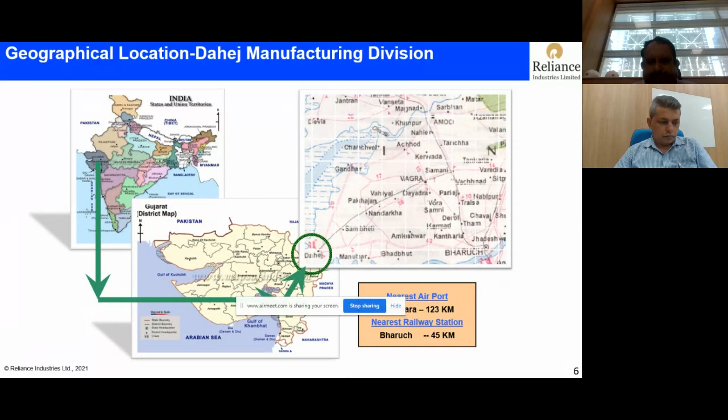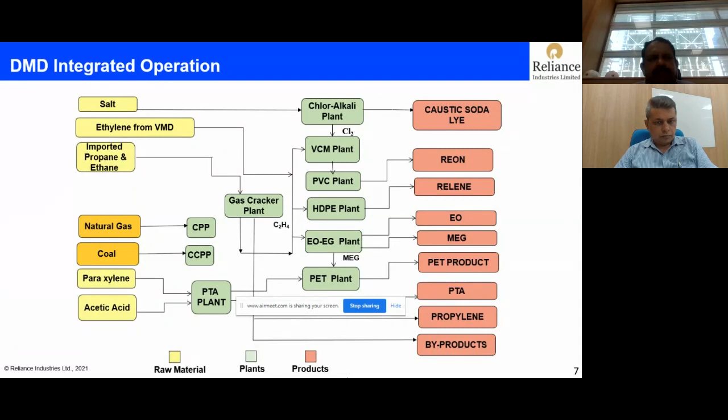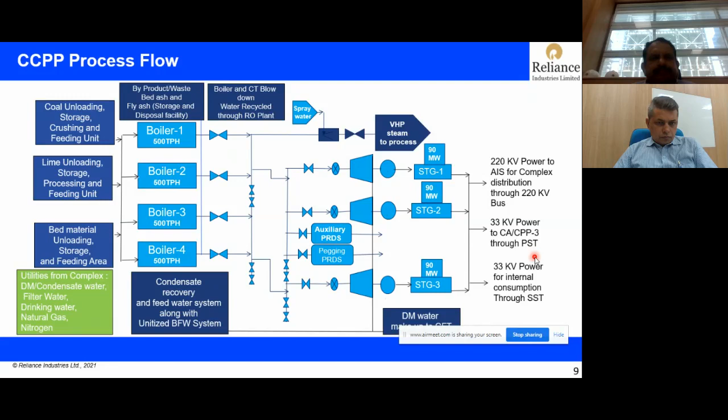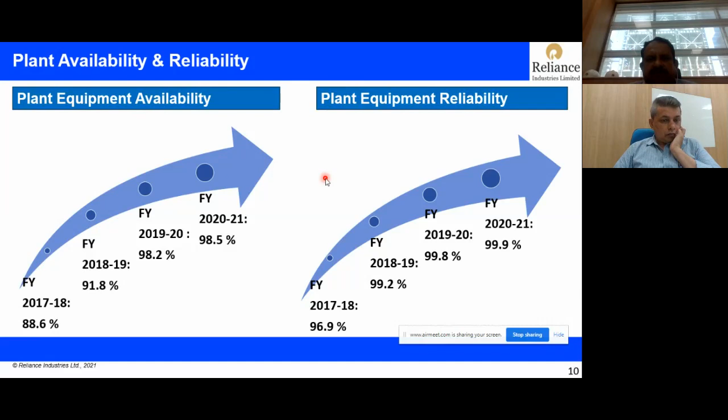When we say MHPC, it is main header pressure control - the entire process itself is automated under normal circumstances. All the boilers are controlled by a process controller, whereby the pressure is maintained. Normal pressure is maintained at around 108 kg, and even with process upsets, we continue to supply to the grid at around 1100 tons out of the 2000 ton capacity.

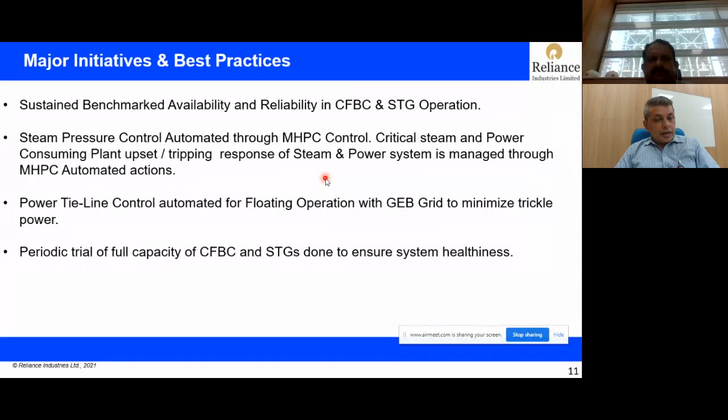Periodic trial of full capacity of CFBC and STG - every month we have one CFBC and one STG trial. So literally every quarter you'll have an STG trial, and every 4 months a CFBC trial. If one CFBC is tried in January, it will be tried again in May. That is how we maintain the capacity, maintain reliability, and identify problems.

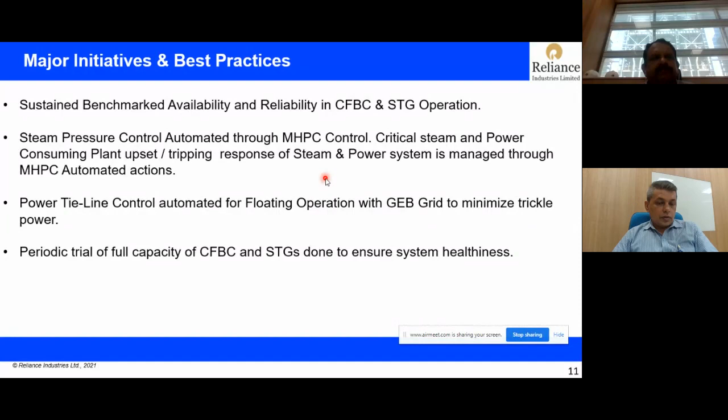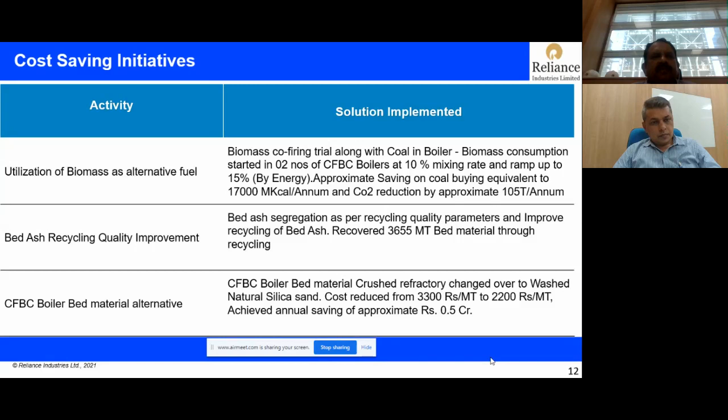Here I want to share a case study, use of biomass as alternative fuel in CFBC boilers. Generally, in stoker fired boilers, there are many plants who are using biomass as alternative fuel. But there is a technology difference in CFBC boiler. All bed material in our furnace remains in fluidized condition, and biomass is a low density fuel. So many modifications and improvements have been carried out for use of biomass.

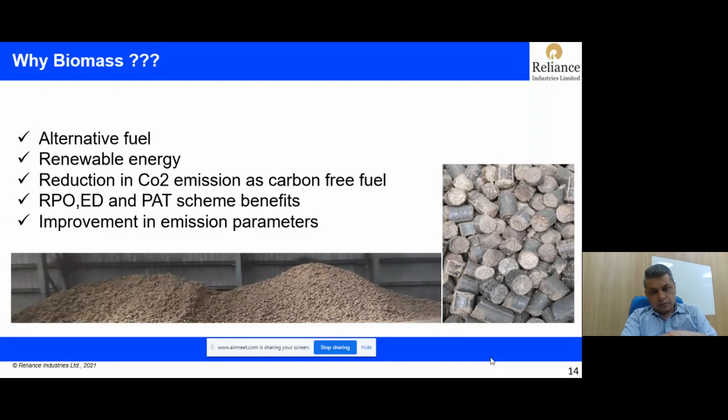So first question is why we use biomass. So biomass is an alternative fuel. Second one is it is a renewable energy and also helps in reduction of CO2 emission, as this is considered a carbon free fuel. Also we can avail RPO, ED and PAT scheme benefits. So first we have taken a trial in our presentation.

Okay sir. Now visible sir. Yes. Okay.

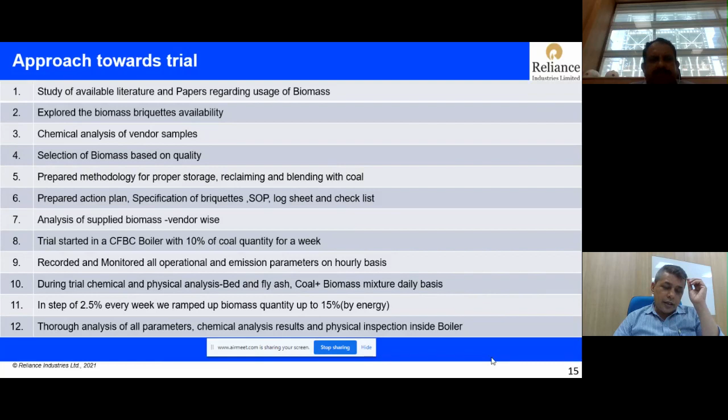For trial of biomass uses, this is our approach. Point 1, study of available literature and papers regarding usage of biomass, so we can collect the required information. This is because largely the biomass usage is limited to 15% at most of the places. That is what we have come to know in India. Most of the users who are using biomass are limited to 15%, and we are trying to establish that biomass usage limitation will not be there. We can reach a maximum number as much as possible, current targets being around 35 to 40% without any significant modification in the existing facility.

So for that, we have gone through a lot of literature, talked to as many people who are experts in the area, and are still to hire a few of them when we are looking at moving beyond, and if we need certain modifications, while our boiler does not sacrifice.

Continue, Vikas ji. Okay, sir.

We explored the biomass briquettes availability in the nearby area. Then we arranged chemical analysis of vendor samples. Then selection of biomass based on quality. We prepared a methodology for proper storage, reclaiming and blending with coal. We also prepared action plan, specification of briquettes, SOPs, log sheet and checklist. When vendors started delivering biomass, we started analysis vendor wise, and the trial started in a CFBC boiler with 10% of coal quantity for a week.

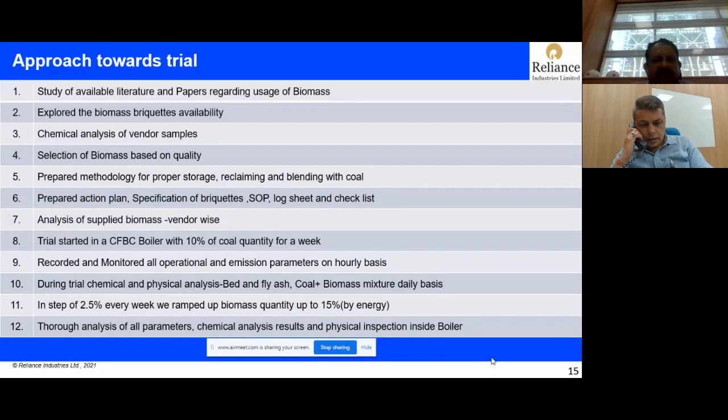We recorded and monitored all key operational and emission parameters on hourly basis. During trial, chemical and physical analysis like bed and fly ash, coal plus biomass mixture on daily basis. In a step of 2.5%, every week we ramped up biomass quantity up to 15% by energy. Thorough analysis of parameters, chemical analysis results, and physical inspection inside the boiler, thorough analysis of all parameters.

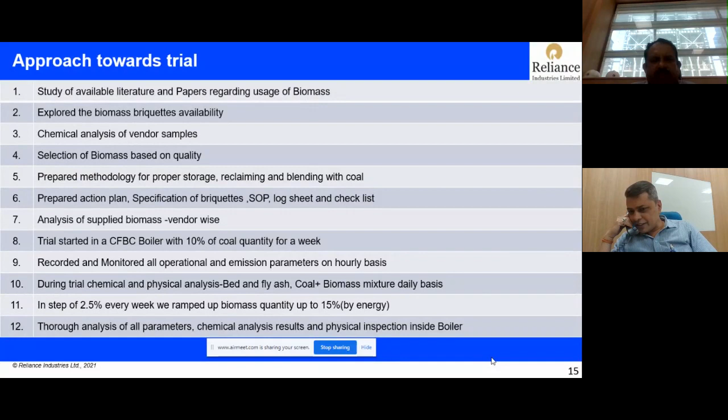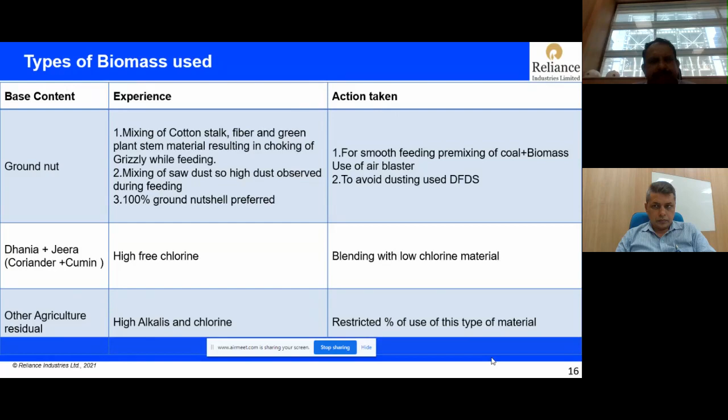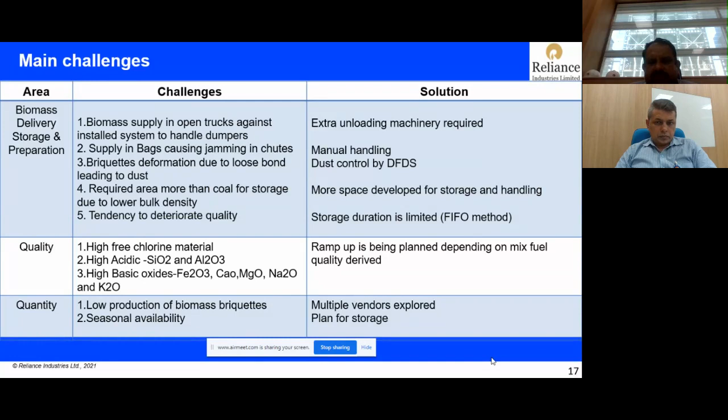The second main challenge area was quality. As I told, we received high free chlorine material and high acidic and high basic oxide material, so ramp up is being planned depending on the mixed fuel quality derived. The third main challenge is quantity. As we know, production of biomass briquettes is low, so we explored multiple vendors, and availability of biomass is also seasonal, so we have planned for long-term storage.

These are the main analyses we carried out. For chemical analysis, with a vendor-wise composite sample, we collected data for proximate and ultimate analysis, ash elemental analysis and oxides in ash residue. We also analyzed ash fusion temperature, free chlorine and bulk density. We also did physical observation of condition: moist, loose bags, packed, etc., size of briquettes, crushed or shredded size, and presence of fibrous and oily material. Material from every truck and dumper was physically observed.

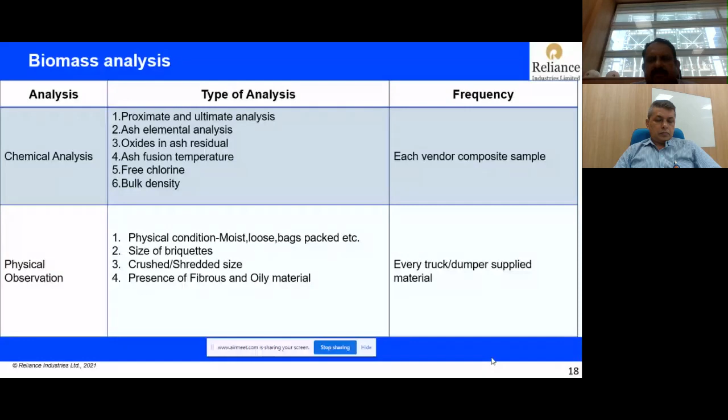These are the main key learnings during the trial. GCV of biomass: volatile matter is higher than coal, but the specific heating value of volatiles in kilojoules per kg is lower for biomass than coal. Biomass GCV is in the range of 3500 to 3900 kilocalories per kg. Fuel air ratio: fuel air ratio, pressure and heating rate significantly influence the heat release rate needed to achieve a uniform temperature profile in our furnace and boiler second pass. Up to 10% there is no requirement for air adjustment, but above 12.5% mixing, slight air adjustment was carried out.

Contaminants: alkali metals and high chlorine presence are the main reasons for slagging, fouling and corrosion, so we reduce the concentration of alkali material and high free chlorine by blending with low-contaminant material. Ash melting temperature: the content of alkali metals, phosphorus, chlorine, silica, aluminium and calcium in ash affects ash melting temperature. We analyzed it and found the ash melting temperature was close to our coal ash melting temperature.

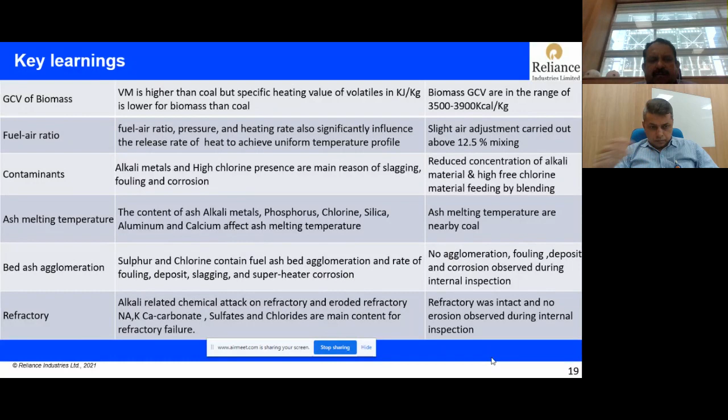Bed ash agglomeration: sulfur and chlorine in fuel ash affect bed agglomeration and the rate of fouling, deposit slagging and superheater corrosion. No agglomeration, fouling, deposits or corrosion were observed during our boiler internal inspection. Refractory: alkali-related chemical attack erodes refractory; sodium, potassium, calcium carbonate, sulfates and chlorides are the main contents affecting refractory, and no erosion was observed during our internal inspection.

These are the main best practices adopted. For monitoring, we closely observe all our flue gas and metal temperature measurements.

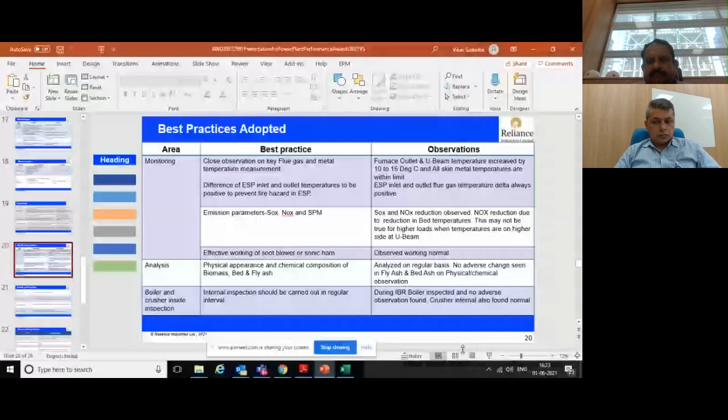Okay, sir. I think so. Visible? Yes. Okay.

So, some best practices we adopted during the trial, like monitoring. We closely observed all our key flue gas and metal temperature measurements, and our observation was that furnace outlet and U-beam temperatures increased by 10 to 15 degrees centigrade, and all skin metal temperatures were within limits. The difference between ESP inlet and outlet temperature should be positive to prevent fire hazard in the ESP. The ESP inlet and outlet flue gas temperature delta was always positive during our trial.

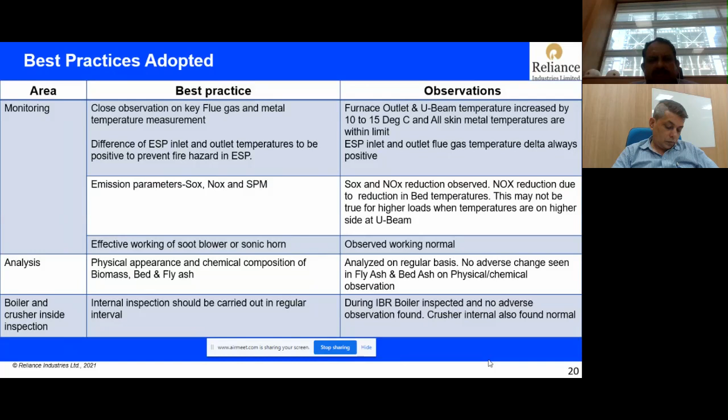Emission parameters: SOx, NOx and SPM. SOx and NOx reduction was observed. NOx reduction was due to reduced bed temperatures, as biomass density is less, so it fires at a higher elevation, and this may not hold for higher loads when temperatures at the U-beam are on the higher side. For SOx reduction, as biomass contains a lower sulfur percentage than coal, overall SOx was less.

Effective working of soot blowers or sonic horns: we have sonic horns in our air preheater area, and we found them working normally. Analysis of the physical appearance and chemical composition of biomass, bed ash and fly ash: we analyze on a regular basis. No adverse changes were seen in fly ash and bed ash on physical and chemical observation, up to 15% biomass by energy.

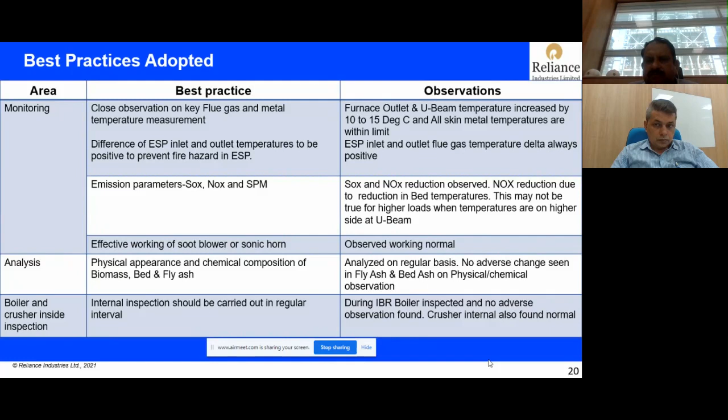The boiler and crusher were also inspected inside; the boiler was inspected during our IBR shutdown. No adverse observations were found, and crusher internals were also found normal. These are the main benefits and our future plan. The first main benefit is carbon footprint.

Vikasji, you cannot see your presentation, sorry. Okay.

Okay, sir, now visible? Yes.

These are main benefits and our future plan. First main benefit is carbon footprint. This is a step towards achieving carbon neutrality, as biomass is a carbon neutral fuel. For RPO and ED benefits, usage of biomass to be ramped up in all our four boilers. For PAT scheme benefits, usage of biomass to be ramped up also in all four boilers.

For emission parameters, due to low sulfur in biomass, SOx reduction is there, and due to lesser temperature in bed during biomass usage, we observe NOx reduction, which both are main benefits.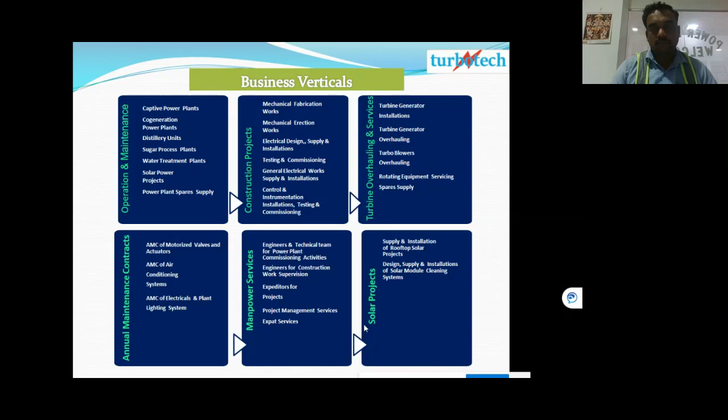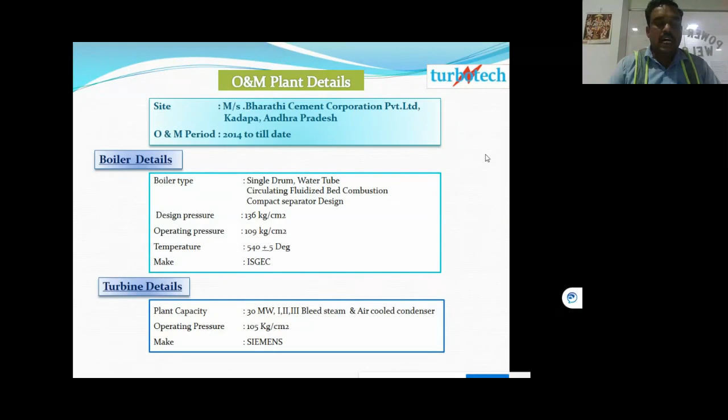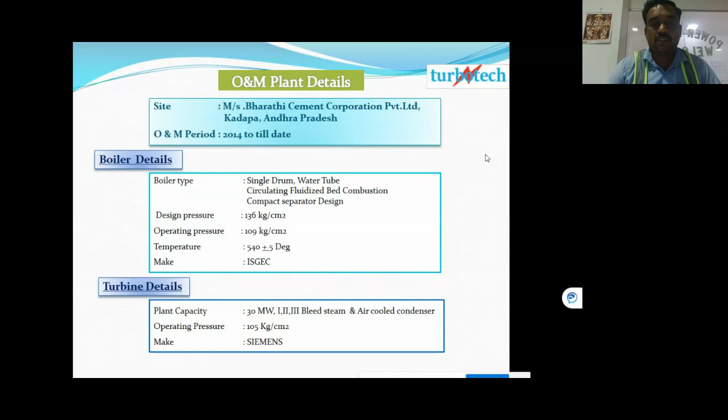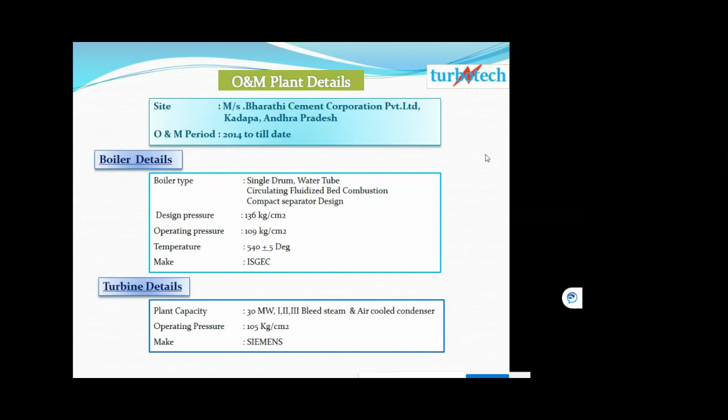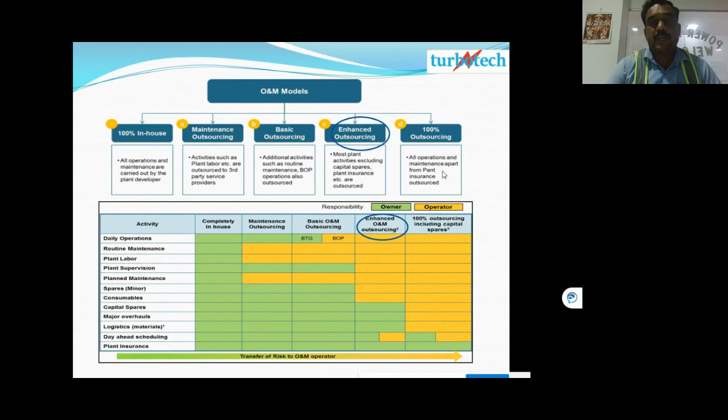These are the standard O&M models. There are five models. Ours is model number 4, engagement of outsourcers for most plant activities, excluding capital spares and plant insurance as extra. This is our O&M model. We have six departments: operations and efficiency, maintenance and overhauling, safety and environment, human resource, procurement and engineering, training and IR.

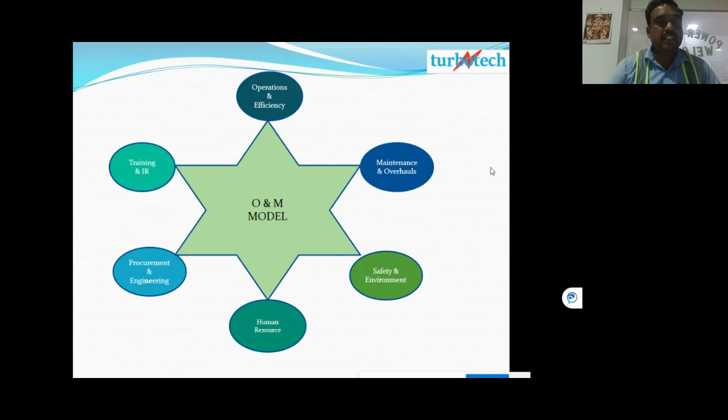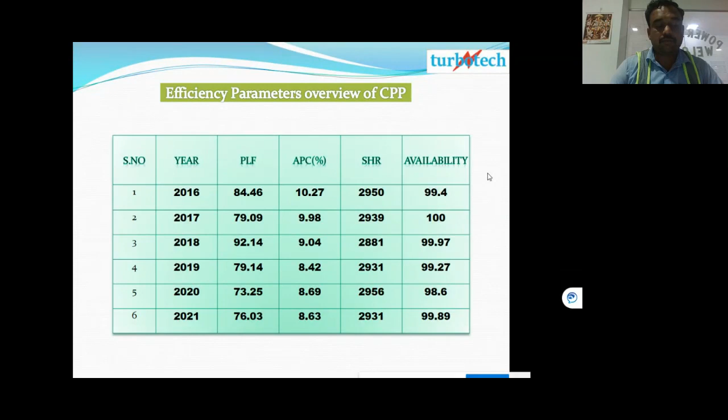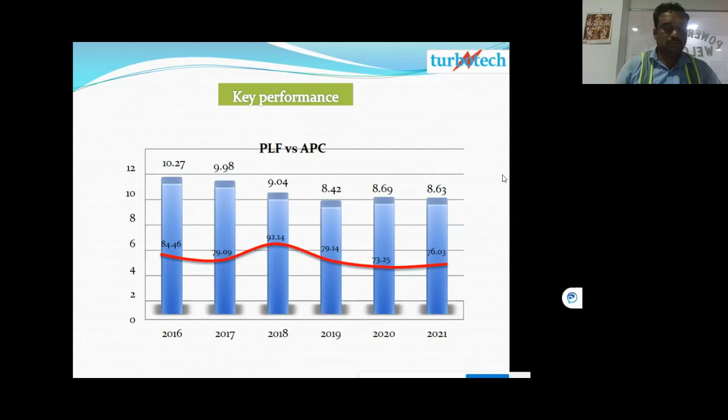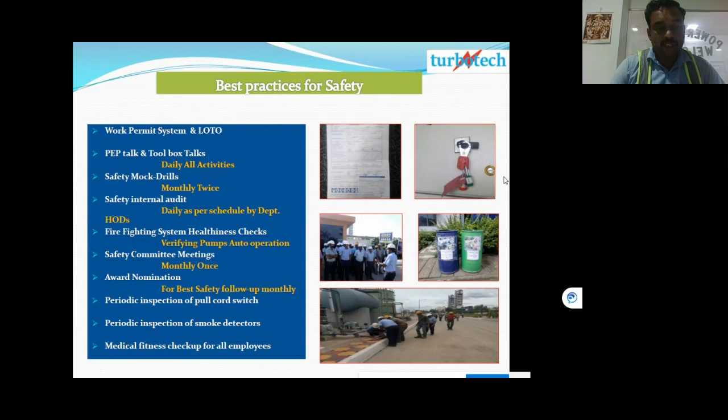We start with everyday safety. Safety first. We maintain the following safety practices: 100% work permit and LOTO system, PEP talk and toolbox talk daily, safety mock drill twice monthly, daily safety internal auditing as per schedule by department HODs, firefighting system healthiness checkup, safety committee meeting once a month, award nomination for best safety follow-up, periodic pull cord inspection, periodic smoke detector checks, and medical checkup for all employees.

Here I am showing the innovative power saving projects. I am not discussing VFDs here; we have already installed VFDs on most equipment. We discuss only innovative power projects. Our plant operates two compressors for the ash handling system, and one for instrumentation. For energy saving, we implemented logical sequence operation of the pneumatic conveying system. Earlier it operated multiple systems simultaneously. After modifying this logic, we reduced auxiliary power consumption by 720 units per day, reduced the compressed air requirement, and switched off a compressor.

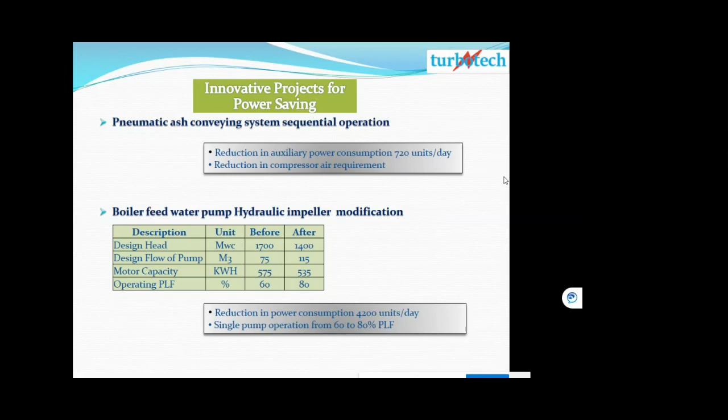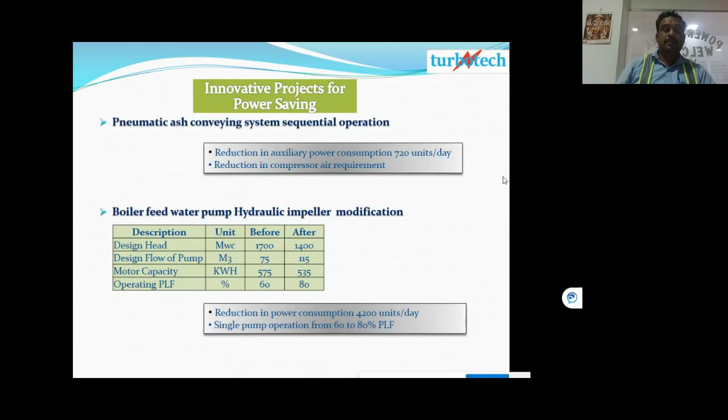One of the best innovative projects, emission control. Earlier the plant was designed with a crushed limestone system. SOx emission limitation was 1500 milligram per normal meter cube. After that, pollution norms changed to 600 milligram per normal meter cube. So it was difficult to achieve this parameter. We implemented raw mill grinding powder from the cement unit for best SOx emission control. We achieved best SOx emission control already.

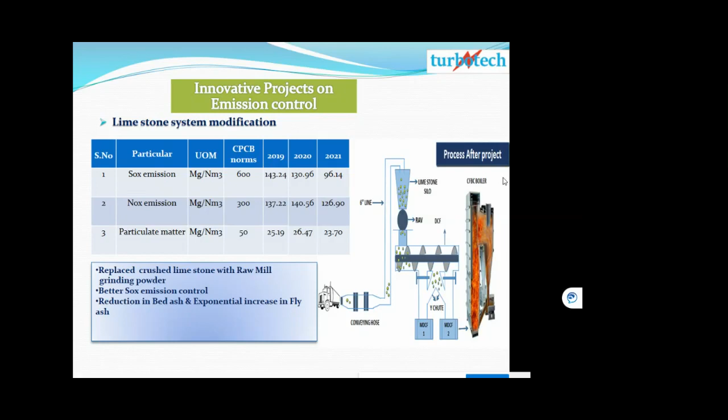Another project for auxiliary saving: air cooled condenser and cooling tower energy efficient fans. Auxiliary reduction project done with better vacuum stability, reducing the fan hub area and weight of the fan, increasing the air intake to ACC.

Another: the Kadapa region ambient temperature is always hot, especially in the months of March to May. So for high ambient temperature, vacuum drop leads to reduced load. To avoid this condition, we implemented an innovative new project, a water mist spray system. Vacuum stability during the summer period, consistent load for export to the cement unit.

Our main water source is from mines, seepage water during the rainy season. Winter and summer water quality changes. So we did an upgrade project for water quality purposes, UF, SAC and SBA. After that, we increased the OBR for the DM plant, reducing the chemical cleaning and reducing the water consumption.

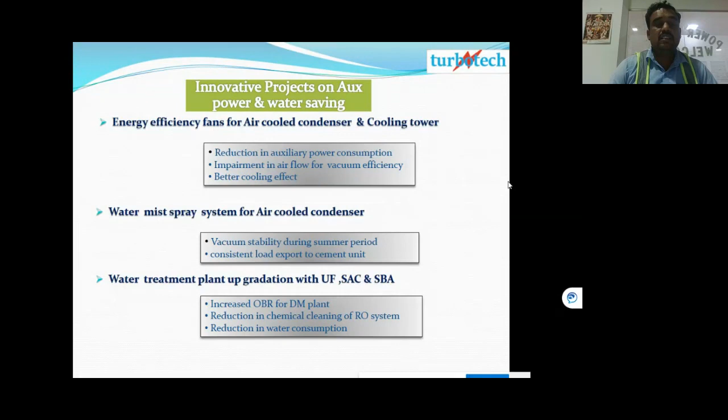We did another project to optimize the PA airflow. Optimize the PA airflow and balance the OFA airflow for best combustion. We achieved auxiliary reduction and reduced refractory damage in the boiler.

Our plant is designed with arrowhead nozzles. We faced the problem of back shifting of bed material into the wind box during plant trips. In this condition, the wind box air bleed off valve opened below 35% PA airflow. We changed it to 0 PA airflow. After that, it's better.

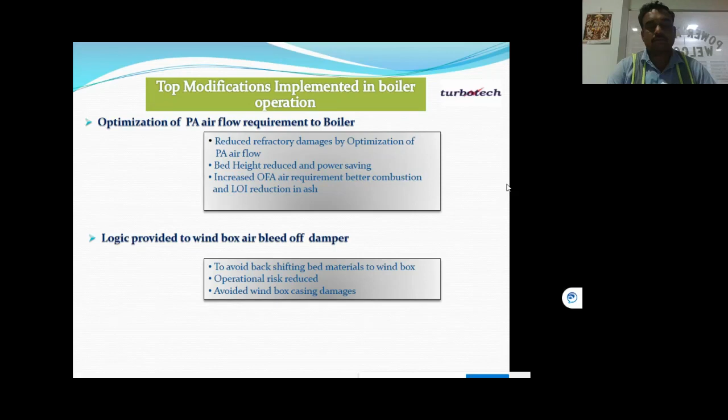We modified and implemented boiler operation and maintenance. Our plant runs in island mode operation with the cement unit. In the cement plant, frequent on-off tripping happens. To avoid this, we provided logic for the startup control valve and fuel feeder auto operation. When load is thrown or breakers open, to avoid excess pressure, the automatic startup control valve will open and switch off the fuel feeder, with combustion control reducing the boiler excess pressure.

Another one, we created efficiency parameters and better DCS control for operator alerts. Another logic, the feed water control system, we modified. Recently we heard that especially in CFBC boilers, the cyclone separator got deformed during water tube leakages. To avoid such a case, we created logic so that when both conditions are satisfied, drum level low as well as furnace top temperature high, the feed water control valve supply to the boiler is cut off.

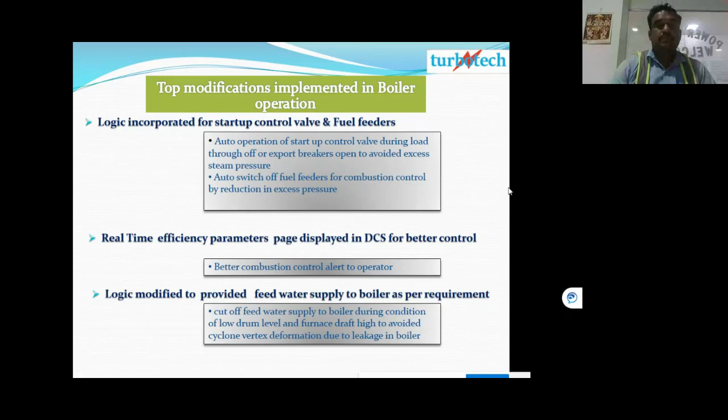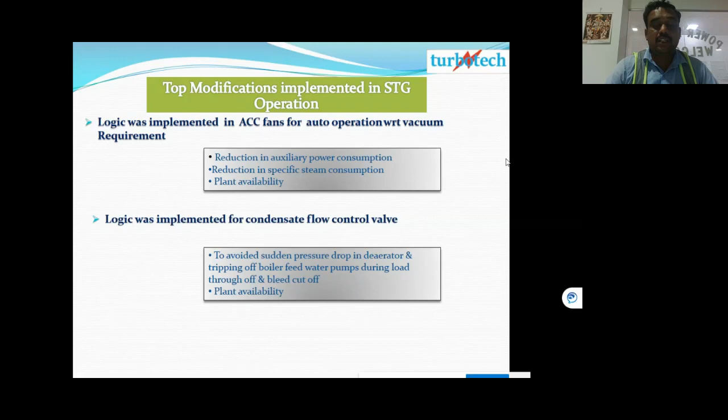Our best practices in operation and efficiency: we conduct a daily morning review meeting, addressing defective equipment and troubles, discussing the previous day's generation, parameters and targets. We review plant performance parameters shift wise. We have shift KPIs. Every shift in charge reports to the operation head as well as the reliever to achieve the KPI.

And we daily review the steam and water quality, comparing the test report with online analysis. We conduct a daily evening coordination meeting, planning, and discussing defects and updates.

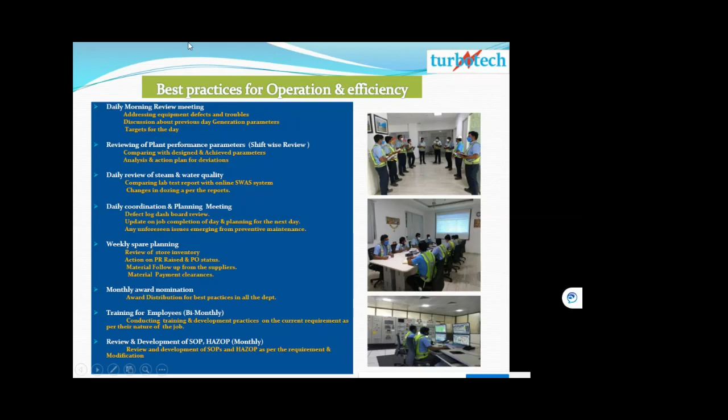We also hold a weekly spares meeting, reviewing the store inventory to check whether required spares are available or not. Action taken, PR raised and PO status, material follow up with suppliers, material payment issue clearance, are discussed every week in the meeting hall.

Monthly we nominate for safety. Monthly award distribution per department. We conduct employee training bi-monthly as per schedule. We review department SOP adherence monthly.

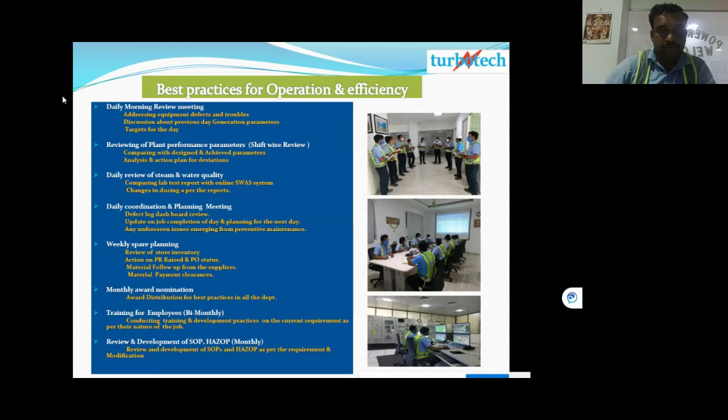We follow best practices in asset management and root cause analysis for failures, combined with discussion, action plan, submitting the report, and analyzing the report.

We address and review the housekeeping register, focus on maintaining good housekeeping, and address leakages and losses.

We implemented a checklist and review it frequently. We address and register leakages and losses, and work to eliminate them.

We monitor emission parameters and ESP healthiness through checklists. We arrange external services for foam cleaning, air-cooled condenser servicing yearly, DCS AMC with 4 visits per year, pressure vessel testing every 6 months, and safety valve servicing yearly.

We address operating efficiency projects, identifying small or big operational efficiency parameters, discuss them with the client, and get approval.

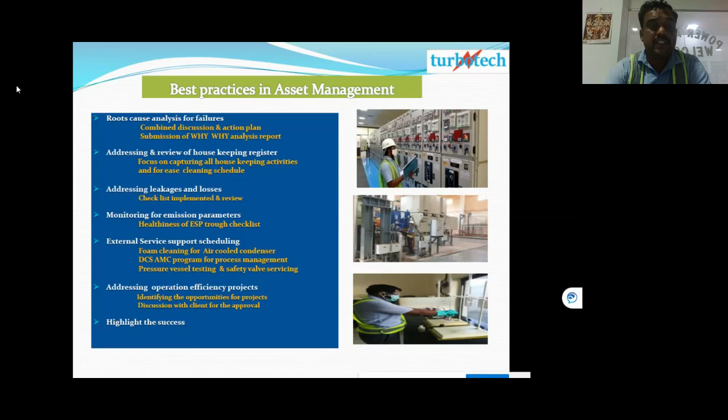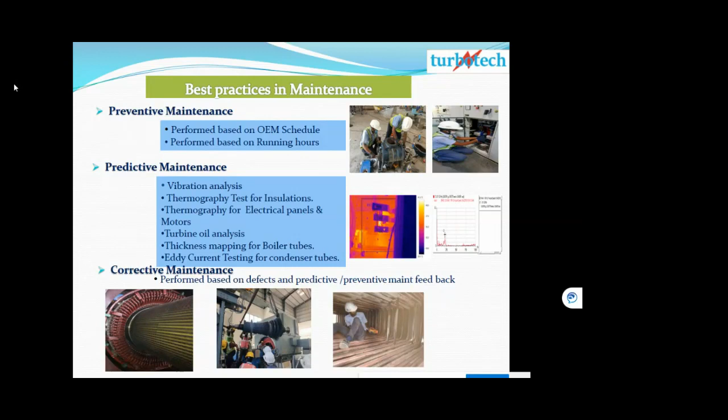Maintenance is carried out as per OEM schedule, based on running hours.

We perform predictive maintenance including vibration analysis for equipment, thermography for boiler insulation, thermography for electrical panels and motors, turbine oil analysis, thickness mapping for boiler tubes, and eddy current testing for condenser tube leakage.

We also do corrective maintenance based on defects. Daily we maintain a defect register along with predictive and preventive maintenance feedback, and take corrective maintenance action accordingly.

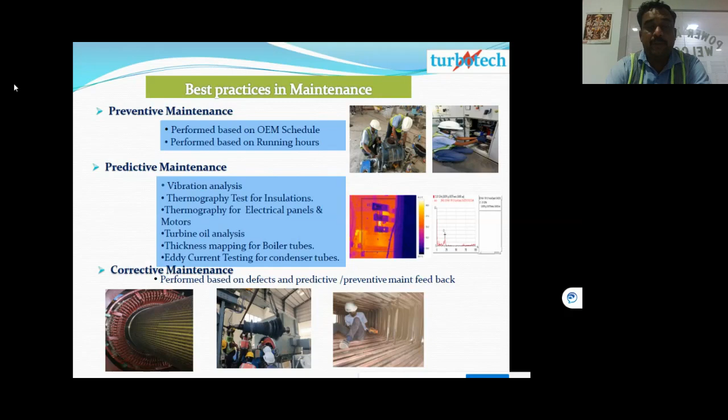Store management is another important area. We maintain a store inventory register listing critical and non-critical spares, essential spares, repairable and non-repairable items, along with price and delivery time.

We maintain the equipment history card, updating it daily. From the history card, we find out frequently troubled equipment and replace it with new ones.

For development of SMPs, we identify new SMP requirements for any process changes, review and modify SMPs suitable for the changes, and practice the new developments.

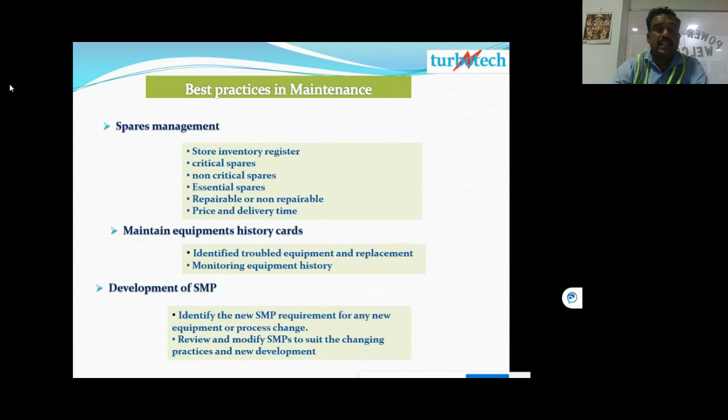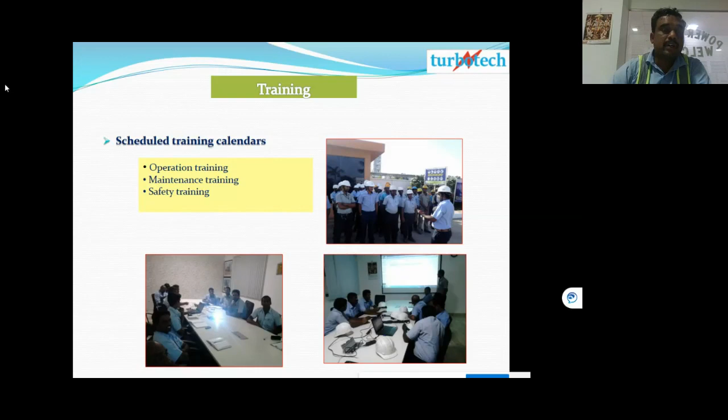We conduct training for all departments - operation training, maintenance training, safety training - on a pre-scheduled monthly basis, twice a month, department wise.

Last time we participated in the CII Energy Efficient Award through the client, and we received the Best Excellent Energy Award.